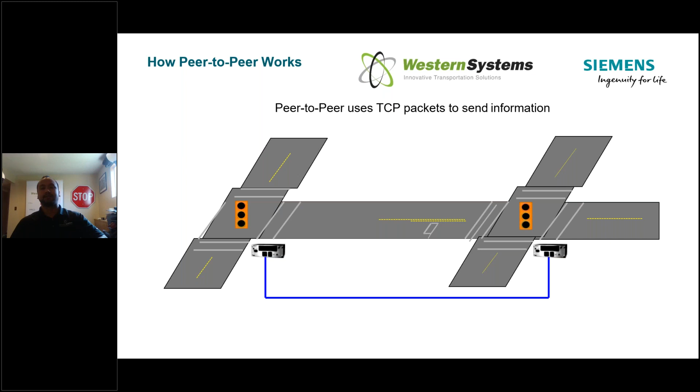When it comes to controllers, their information is nothing compared to the data required for sending back video or something. It's literally just small packets of information telling, this is what I see, and based on what I'm doing, I'm going to give you the command to do this. So in terms of increasing data on your network, it's not a big data hog to set up some of these simple logic statements.

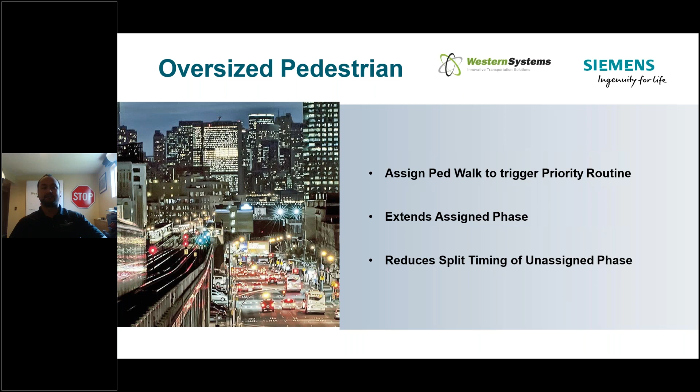Trigger priority event based on oversized PED. This is just your Siemens assigning function screen. This is where our source function, when we get a PED walk, and then what we're going to—that's the if statement: the PED walk signal comes up, and the then statement is the priority on that particular detection input. So essentially what we're doing is saying it's not based on time of day, it's based on actual events that are happening. When this comes up, we want to trigger this.

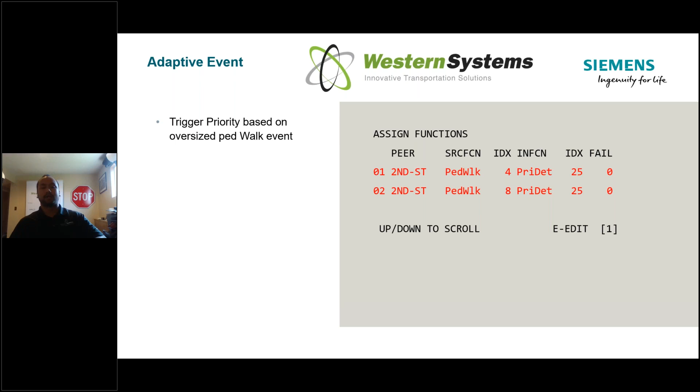Another example of using peer-to-peer: you can actually peer to yourself, and if that sounds confusing, it was confusing to me at first too, in terms of using this functionality in the controller to assign different functions back to the same controller.

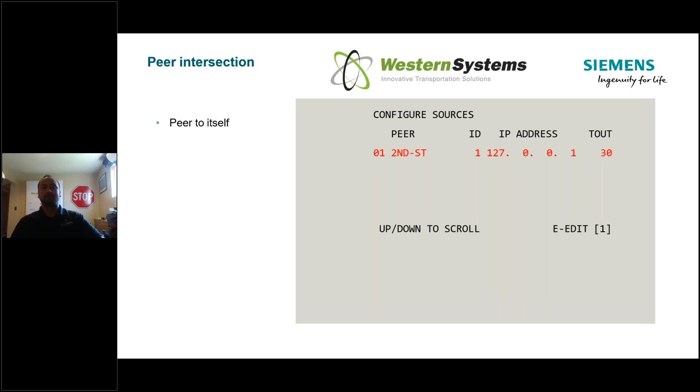An example of where you might do this: we've all seen these flashing yellow arrows come up. Well, the traditional treatment of the PED signal, the PED movement that would conflict with that left turn, is to omit the flashing yellow arrow when the PED signal comes up. Well, the reality is maybe there's enough time to still give that flashing yellow arrow after the PED's gone through. You've moved the pedestrian safely through the intersection, but there's got to be a way to trigger that flashing yellow arrow to come back up.

So in peer-to-peer, one of the applications we've done is we've assigned a dummy detector. We put a dummy call into the controller after that PED walk goes down. So the pedestrian safely crosses, you've got a red arrow for the left turn movement. Maybe it stays free there off of the main line. We don't want that to become a flashing yellow arrow where people are trying to sneak across traffic or sneak in between vehicles and potentially create a dangerous situation for that pedestrian.

So what we're going to do is wait for that PED clearance to go down. We're going to place a dummy call into the controller that says, okay, if there's enough time on that phase after the PED moves through, we're going to bring back up the flashing yellow arrow for the rest of the split time.

Adaptive school zones. So in and around school zones, loading in special functions to different phase banks to drive traffic patterns in and around schools, depending on whether we expect school traffic to be in session. So whether that's specially placed detectors, whether that's tying into nearby HAWK signals, adding extension times at certain times of day—peer-to-peer allows us to send information to nearby intersections and essentially make our school zones a lot safer.

Minor intersections. So on your non-main corridors, set priority routines, set minor intersections into free. Maybe a free operation is more efficient for whatever use case you have in front of you. Use priority routines to force off minor intersections. Turn these minor intersections into a green band. Similarly, we talked about moving platoons through.

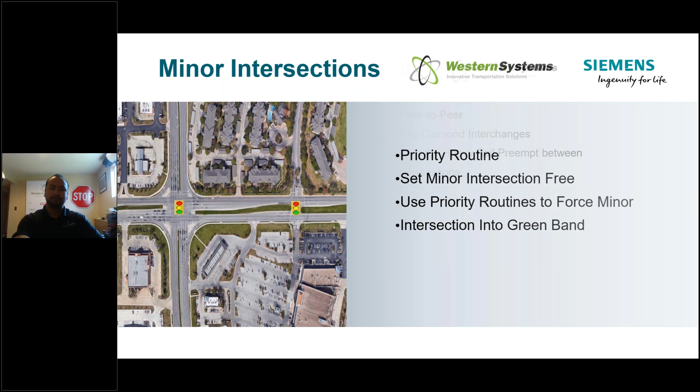Heavy rail preemption. So this is a big one when it comes to safety concerns. We've got Burlington Northern Santa Fe that goes right up and down the West Coast here, and some east-west heavy rail movements. So the idea here is a preemption event. It's not necessary to put a true preempt call from the train into every signal. We can get each of these controllers talking to each other and sharing information about those preemption events. So maybe you've got your preemption, your Opticom, or whatever it may be at one of these intersections, but you want to also drive the behavior at these other 3 locations. Well, we can program preempt calls using peer-to-peer.

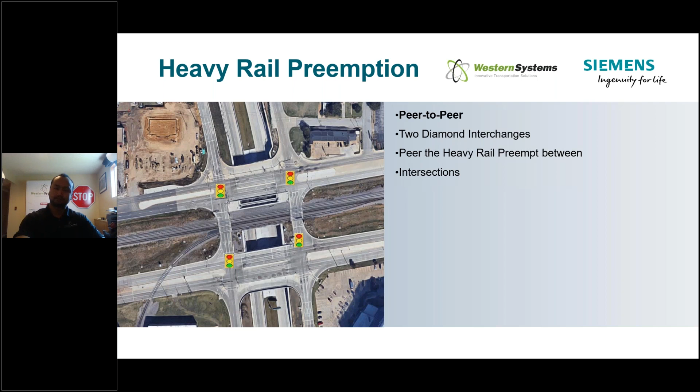Peer-to-peer reports. So this is your report menu. It's going to give you the month and day, obviously the time. It's going to show you all of the peer-to-peer events that may have happened. So you want to look in and see how effective is my programming? What's the status of my peer-to-peer network that I've set up?

Right from the controller, you can download it as a CSV file, or if you're using TACTICS, you'll be able to pull back that information and really get a feel for, before and after you put in this peer-to-peer, how effectively is it being used? How often am I triggering events? And then maybe make some changes as you might see necessary.

So I'm going to talk a little bit about a couple hypothetical use cases. Those are the ones that make most sense to us, and maybe get your heads working on some potential applications in your agency that might be able to benefit from this. Again, it does take a little bit of programming. It's very simple once you get the feel for it. And our technicians, we've got 5 up and down the West Coast, are really good at setting up peer-to-peer, just given the information of the situation.

So you can say, I don't exactly know how this works, how the peer-to-peer is set up, but we've got a situation where we're trying to flush people off the freeway or whatever it is. So I'm going to try my best here to give you a visual idea of some of the things that this is able to do, and go into a couple more use cases.

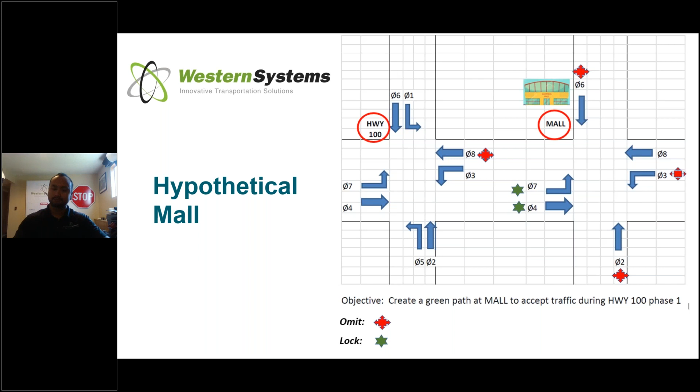So you can see, I hope that's a good visual there. Phase 1 on the highway there is the left turn movement towards the mall. Phases 4 and 7 are your through movement and your left movement to get to the mall. So we're going to try and flush people off the freeway, move them over to the mall, and omit these phases that are less important. We're less concerned about backing up traffic because we're more concerned about the safety of people coming off of the highway. So that's a hypothetical use case scenario.

I'm going to talk to you about a couple of real life situations where we had opportunities to use peer-to-peer to increase safety. I don't know if anybody's tapped in from Coeur d'Alene, but Coeur d'Alene has been doing a lot of cool things lately in terms of upgrading their communications network, their traffic controllers, just about everything they can to move traffic more efficiently. And one of the things is they've upgraded their controllers to Siemens M60s and used peer-to-peer for certain situations.

So I might have glossed over a little bit of the key facts. Although this is specific to Coeur d'Alene, I want to go into a little bit the hardware required for setting up peer-to-peer. Now, peer-to-peer is just two computers talking to each other, so it doesn't require a central system. As much as we think most agencies that we do business with could benefit from having a TACTICS system where everything's coming back to a central location, giving you the ability to see your camera, see your controller data, have control of your entire network in one location, that might not always be possible for some agencies.

And what I really want to hammer home here is you can do a lot by having controllers that are talking to each other. They need to be connected via some sort of Ethernet or serial connection. So while the limit of Cat5 cable is about 300 feet, you're not going to be able to run Cat5 between controllers in a lot of situations. This is a great use case for wireless radios. You could do it with cellular networks, whatever your agency is comfortable with. You just need to get controllers that you want to be doing peer-to-peer with talking on the same network.

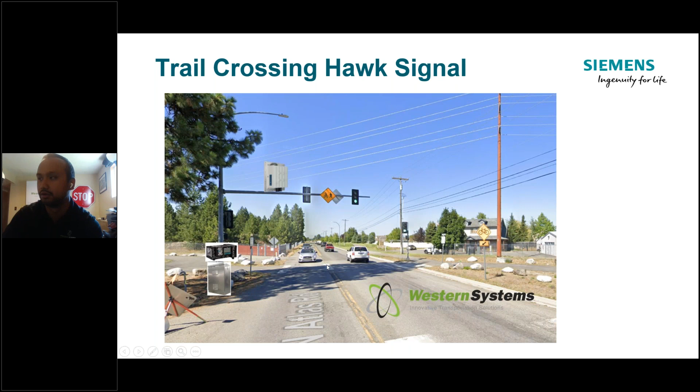So we have vehicles on phase 8 going down Industrial Loop, and when phase 8 is on, what we want to do is we want to omit the phase, just a single phase HAWK signal here. So when phase green on, omit here.

And in layman's terms, what we're trying to do is prevent a green light where vehicles are flying around the corner while pedestrians have pushed the push button. They think they're in a safe situation, and there's a potentially hazardous situation. So while this phase comes on, that's what we're doing over here.

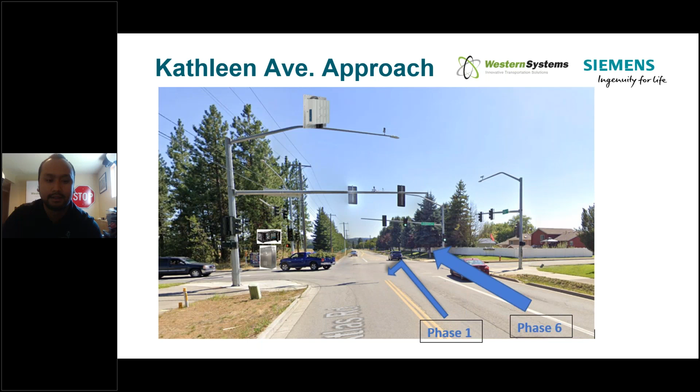Down here, the goal is to flush people onto Kathleen Ave, which is kind of the major arterial in and out of this kind of neighborhood mixed use area. So what we're going to do is we're going to place calls on 1 and 6 when phase 8 comes up at that T intersection. So in other words, we're giving this intersection down here a heads up.

The vehicles are coming. You can see we've got an Iteris Vector detector looking down Industrial. It's able to tell us how big our platoon is, and it's going to place calls based on vehicles being sensed with the detectors here, and it's going to say, hey, just so you know, Kathleen and Atlas, we've got a group of cars coming here. We're going to place this call before it would otherwise be placed.

The alternative would be waiting till you're hitting these stop bar detectors after these have come around, and then you've created a very, very slowly reacting system. This gives us the ability to, again, peer-to-peer, we call it a local adaptive. It's giving us the ability to make these things happen one step ahead of time as they normally would. So that's the Coeur d'Alene use case.

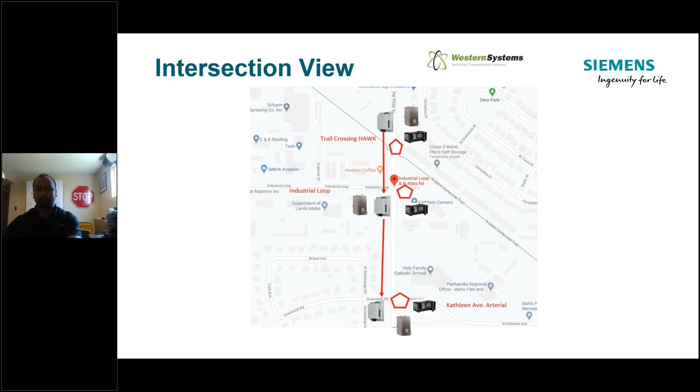This offers you a fail-safe for your Opticom. There's a number of different flavors out there, but if you're using infrared sensors, we all know we need line of sight to that next one. How about letting the controller do the work for you? As long as you've got good, reliable comms, it's going to send that preemption signal down so that that intersection can operate in a safe manner and be more responsive to that fire truck or emergency service vehicle's need.

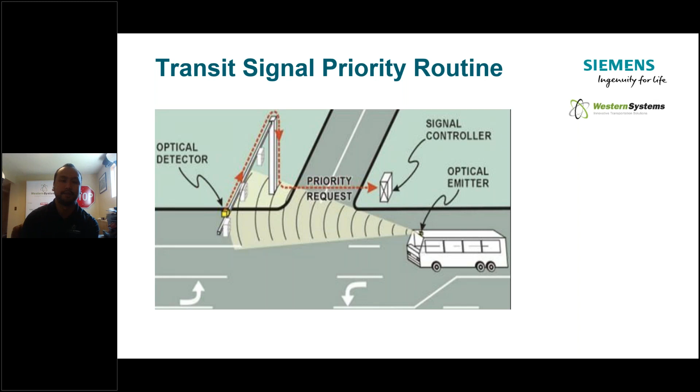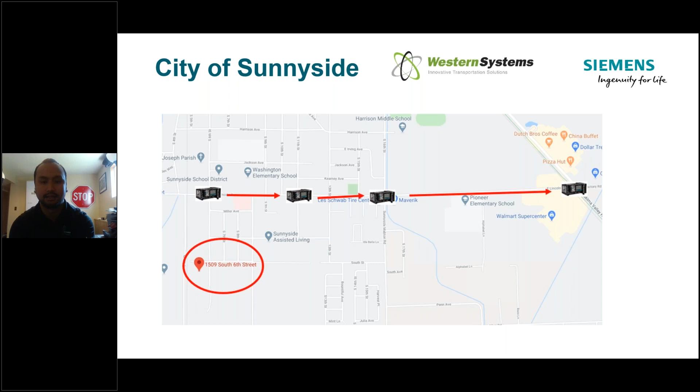And that's all I got. I appreciate you guys bearing with me. Hopefully that gave you guys some inspiration or some ideas for what you could possibly be doing with your existing inventory of Siemens controllers, or maybe you're not a Siemens user and you're just interested in the capabilities.